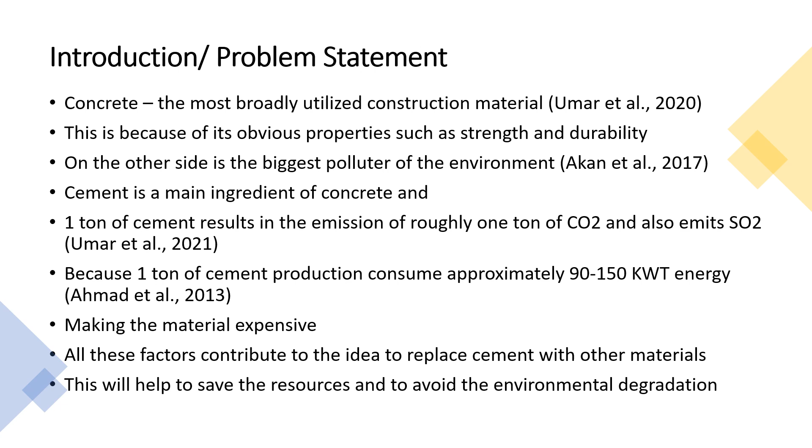And therefore, researchers are trying to investigate and adopt different alternative materials which could be not only environment friendly but can also reduce the cost of concrete. So if we look at the example of China and India, they are the world's leading producers of cement, but at the same time they are also the leading environmental polluters in the world.

Because the earth's population is increasing, the cement demand will double in the next 30 years. So if we adopt some supplementary cementitious material, we can not only meet our cement requirement, but we can also reduce the energy and CO2 emission, and we can thus protect our environment.

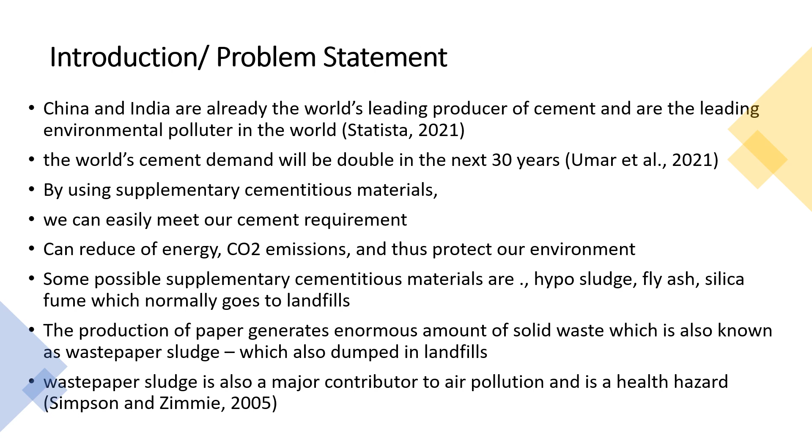There are several materials which have cementitious properties, and one of them is waste paper sludge. Waste paper sludge normally goes to landfill, and it is also recognized as one of the major contributors to air pollution. Paper sludge is classified as a class 2 liquid alternative fuel, and if it is burned, the fly ash has the same properties as Portland cement.

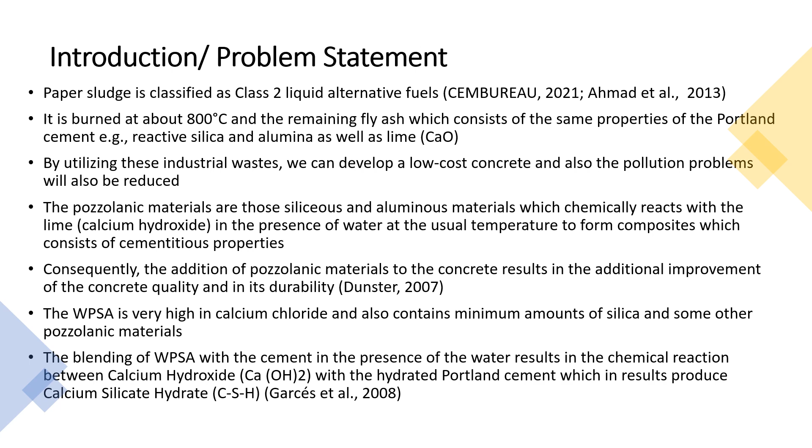And if we utilize this fly ash, we can produce low cost cement, which can also be environment friendly. The reason for that is that waste paper sludge ash is very high in calcium chloride and also contains a minimum amount of silica. So the blending of this ash with the cement in the presence of water results in a chemical reaction between calcium hydroxide and the hydrated Portland cement, which in turn produces calcium silicate hydrate.

So we have used that ash powder in concrete to see its performance. M30 concrete was made with different percentages of paper waste from 0 to 40%. Ordinary Portland cement was used in the experiment, and the waste material, the ash, was obtained from the University of South Wales. Here in the table, you can see the composition of the cement and the hypo sludge which we have used in our experiment.

For example, if I just look at the first item, the lime or calcium oxide: in cement we have 62%, and the waste material which we have used has 46.2%. So it's not quite equal, but roughly they have the same content.

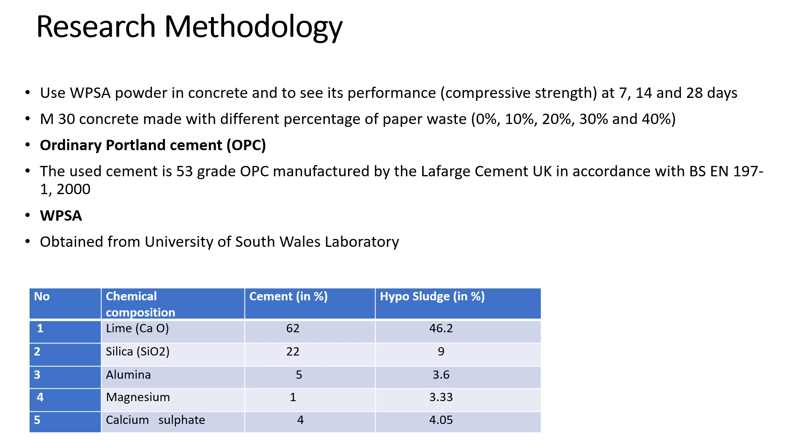So apart from using Portland cement and the waste paper ash, we have also used coarse aggregate, fine aggregate, and water, which are the normal ingredients for concrete. We have produced and tested 50 cubes of concrete, 10 cylinders, and 5 beams. The focus of our laboratory tests was on compressive strength, split tensile strength, flexural strength, and water absorption.

The water cement ratio to produce the samples was 0.6, and the samples were placed in a water tank for curing for the required number of days.

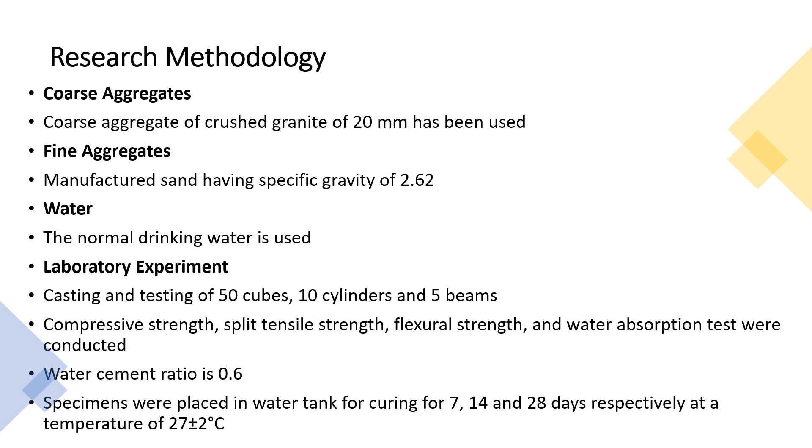Here is the detail of the samples which we have produced. So here you can see the description of the cubes, the 50 cubes, and the percentage of the waste material which we have used, the ash, and then the number of the cylinder which we have produced, and then the number of beams which we have produced with the different percentage of the waste material.

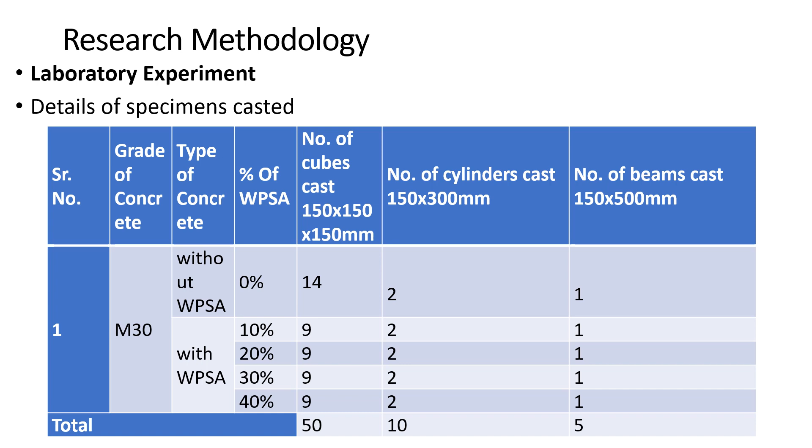15 cubes were tested after 7 days to check its compressive strength. The remaining cubes were tested after 14 and 28 days. For water absorption test, the samples were kept in the oven for 24 hours at 110 degrees centigrade.

And in the tables, you can see the mix proportion where you can see the ash percentage. The water cement ratio was same for all the samples, and then you can see the cement, fine aggregate, the ash which we have used, the coarse aggregate, and we have also tested the slump values for that.

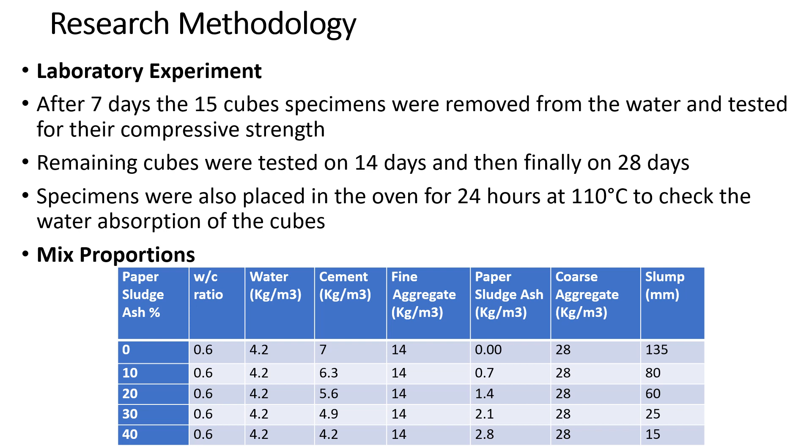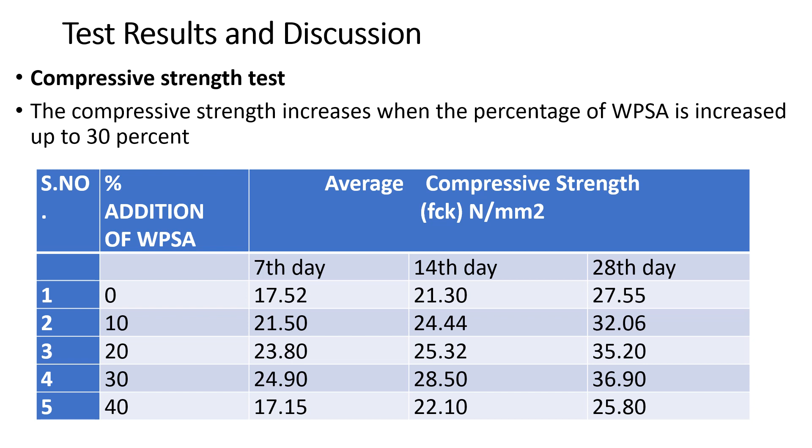So let's look at the test result, and the first one is the compressive strength. So as you can see in the table, the compressive strength basically increases when the percentage of the waste paper ash increases, but this increase is only up to 30%. If you increase the percentage of the ash more than 30%, then the compressive strength basically reduces. This is applicable on the strength on 7 days, 14 days, and also on the 28 days.

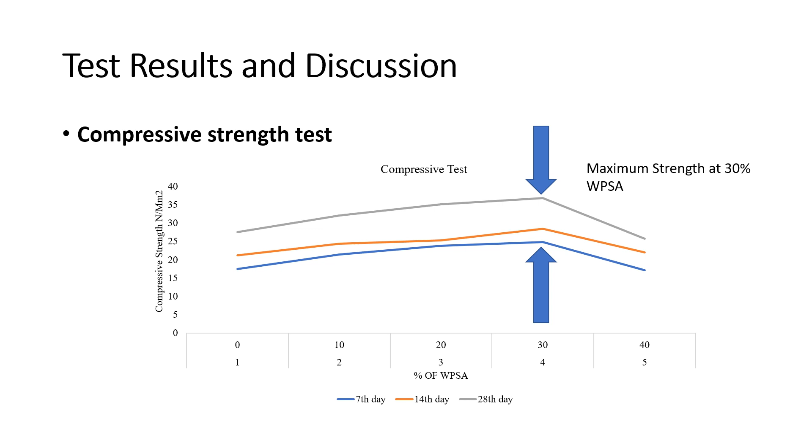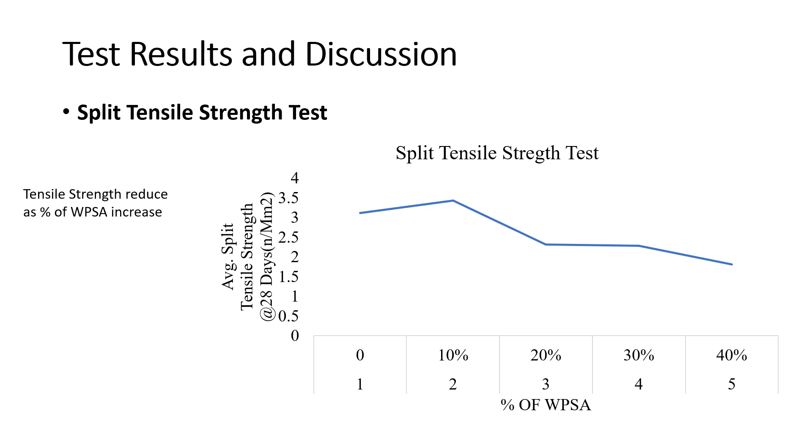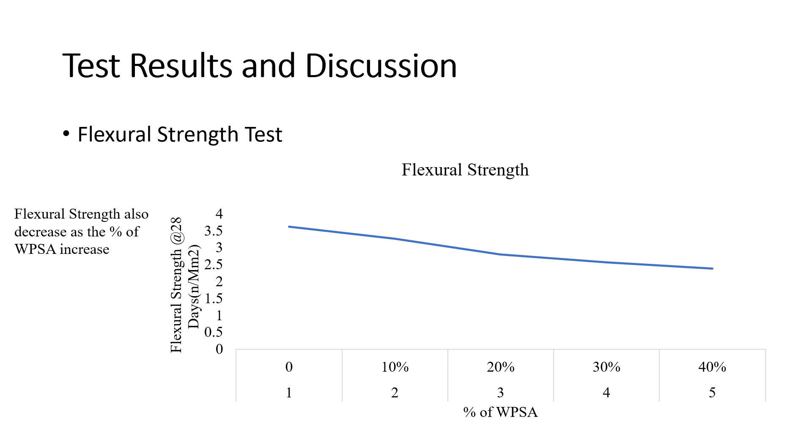The situation over the split tensile test is totally different from the compressive strength. So here from the graph, you can simply see that the tensile strength basically reduced when we increase the waste paper ash. The same thing happened with the flexural strength as well. So as we increase the waste paper ash, the strength basically reduces here as well.

In terms of the water absorption test, the result indicates that the water absorption increases as the percentage of the waste paper ash increases, but that is only up to 30%. When we increase more than 30%, then the water absorption basically reduces.

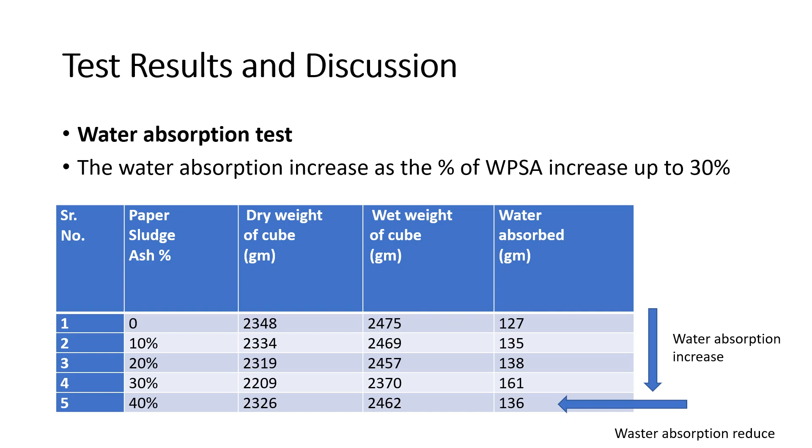So from this study, we conclude that waste paper sludge ash has a positive impact on the concrete compressive strength, but there is a negative impact on the split tensile strength and also on flexural strength. Water absorption also increases with the use of the waste paper sludge ash.

So clearly we can use the waste paper sludge ash where we encounter only compressive strength, and it can also help us to reduce the cost of the concrete and can also help us to reduce its environmental impact. Further experiment can be done by mixing waste paper sludge ash with some silica admixture. The use of gypsum, lime, and other material can also be investigated, and the sample can be tested for a greater number of days.